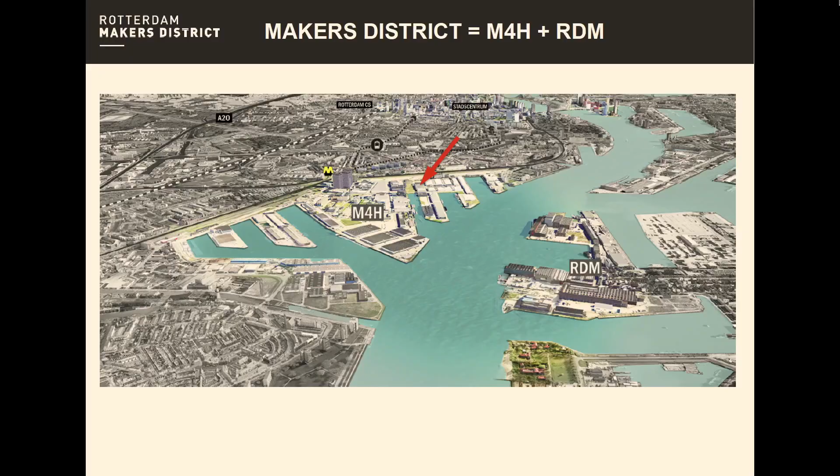Very quickly, some of you have already heard the stories, but again there are always new people, so very, very quickly: this is the Keilepand. We are in this area, M4H, and it's an area as big as the city center of Rotterdam. And in the coming 20-30 years, this area will be completely transformed into a living and working area.

We came here around 8 years ago, and at that moment it was clear there would be transformation, but not what the ideas of the municipality were. And we started together with the IABR, the International Architecture Biennale Rotterdam, who also have an office in the Keilepand, to talk about this.

So to talk about, okay, if we know that this new area is coming, what does it mean for energy, for water, for climate? And very quickly we came to the conclusion that to be circular, you have to do that together.

So we were very happy that this series was pretty successful. We did, I think, around 15 of these evenings over the turn of a couple of years. But even more happy we were that after a year, in 2019, we understood from the municipality that they wanted to have M4H stamped as a circular development.

And they pronounced 8 sustainable principles for the area. And the whole overall motto is collectivity as a basis for circularity. And that is something we try to do - we really try more and more to find each other to talk about it.

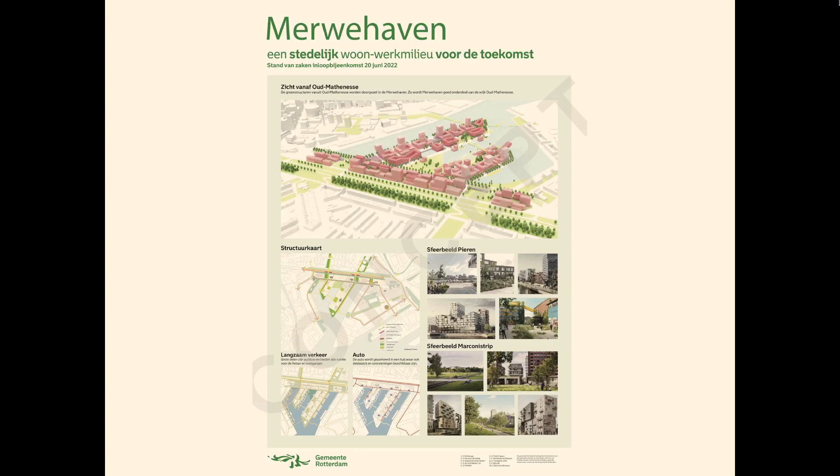Why this exhibition now? Building will probably start really quickly now, I think this year or the coming year, and exactly in 2030 this should be done. This is Merwepier in M4H, and of course this really needs to be Paris proof. This needs to be carbon positive, we hope. This is what we talk about, and what we do with the whole exhibition, because it's a setting to talk about how we get there. So tonight is one of these evenings.

On 15 September we stop, and be invited, because I hope that at that moment we can also tell you what we have achieved with all the debates and talks about the subject. Thank you.

Thanks, Monica. The first speaker I'm going to introduce tonight is one of the founding fathers—he objects to that term, he is one of the initiators, we're doing this with a family, with a team—one of the founding fathers of CARBONLAB, GROUPA's CARBONLAB, and one of the founding fathers of Carbon Stories as well. He will talk about what it means to aim for Paris proof in 2030, 2050, and what role installations have to play in that. Please welcome Willem van Genugten. Thank you.

Welcome to everyone, great that you are here. Zooming in on M4H, let's zoom out a bit. What are we talking about? What is the scale of the problem of what Monica called the mess we're in?

The scale is this: every 28 days we build the entire city of New York. Not just Manhattan, the entire city, all 5 boroughs—steel, glass, concrete, light posts, asphalt. We add this to the built volume of the planet every 28 days, so 13 times a year in total. We're now more or less in the middle of that. You can imagine what this means for the Paris Accord, and also what it means for water quality and air quality. So we need to change this.

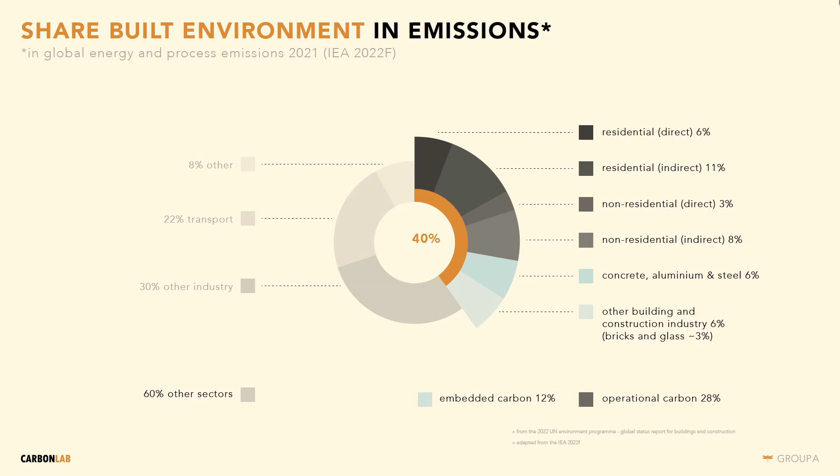Another way of painting the picture: when you look at carbon emissions related to construction, related to our sector worldwide, we're responsible for about 40% of energy-related emissions. 28% of those are related to maintaining the built stock, the existing building stock, in terms of energy—keeping them comfortable, and maintaining them by renewing facades and making changes to those buildings. The other 12% is what we call embodied carbon: all the emissions related to the act of constructing buildings, sourcing materials, manufacturing building elements, putting them on site, and putting them into a building.

This brings the question: what does this mean in general? How could we decarbonize? And the topic of tonight is, what role do installations play in this? I'm going to tell you an anecdote about a good friend of mine, Jacco Paauw. He's an architect as well, of HOH Architects. He once held a lecture in a chapel, a centuries-old building.

It was designed to speak with people, to address people—great acoustics, good light conditions, good temperature conditions. So perfect, no technology needed. Then, before the lecture started, the technical department of the chapel, of the lecture hall by then, closed all the windows to make it dark. Then they put on the show lights to make it light. Then the people came in and closed the doors. It got hot, so they turned on the air conditioner, which had a zooming sound. And then they gave microphones to allow the speaker to speak. So conditions that were in themselves perfect, then a lot of technology was used to simulate an already existing situation.

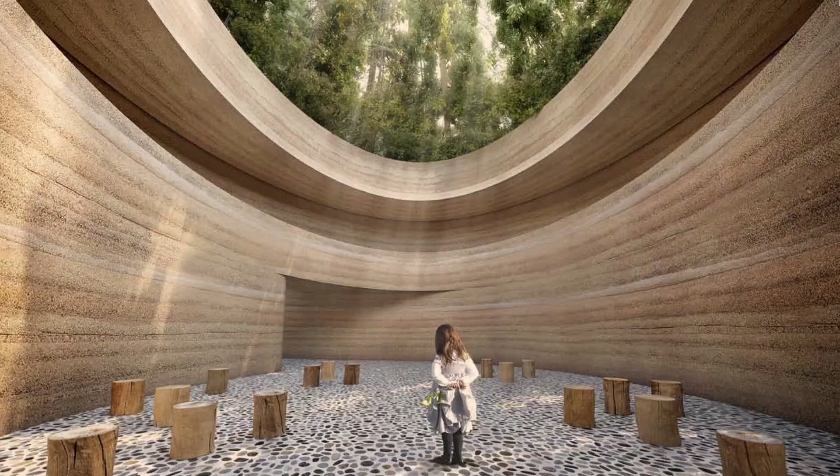That brought us the question we tried to answer with a prototype design: can we go back to a situation where we look at the design first, don't take technology as a starting point, and then see where technology has to be implemented? So not technology as a basis, but only where you cannot avoid it.

We do this because installations over the past decades have become a huge part of the budget—both the financial budget of buildings and the carbon budget. And this increase is not coincidental. It's because we started changing the way we build, and changing the way we regulate. This coincides with a sudden change in how we construct buildings.

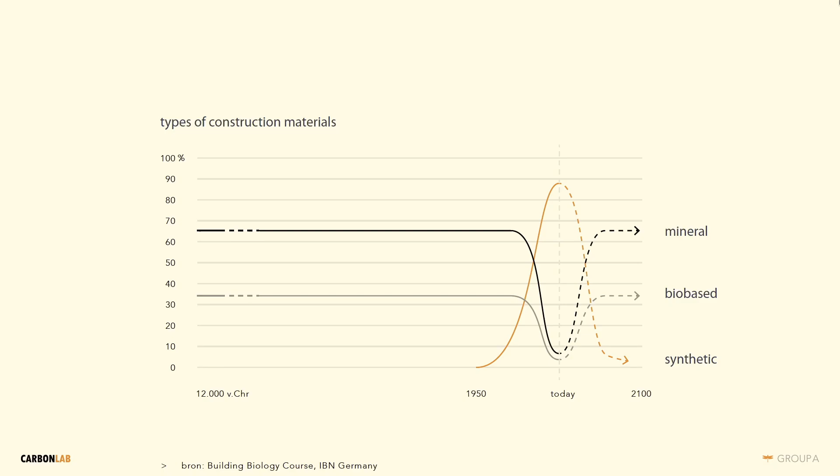So this is about how to integrate the design question. We changed the way we materialize our buildings. This led to a different need for installations to create the right comfort. This coincides, of course, with an incredible rise in carbon emissions, all more or less post-war.

This is what it effectively means for the building sector in our country. The remaining carbon budget of the Dutch construction sector, which concerns us all, if we don't change the way we build, is finished in approximately 2028. For the city of Rotterdam, it's actually 1.5 years earlier. You can imagine then we may have to just stop the act of building, or can we spread those emissions over a longer period of time?

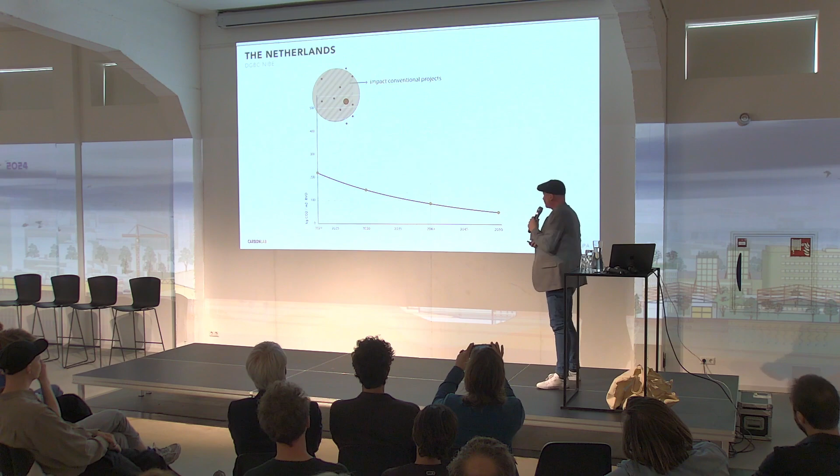So we posed the question in line with this exhibition: can we design a building that is high density, that fits the needs of tomorrow, of today, that fits within the Paris proof line, and not the Paris proof line of today, because we know our construction usually takes time. What we start designing today should meet the requirements of 5-6 years from now. So we looked at, can we bring a building within the Paris proof line's limitations of 2030?

Effectively meaning, can we go from 435 kilograms of CO2 emission per square meter, bear with me, to 139. And we even asked ourselves the question, can you go to 2050 targets, which is 50 kilograms per square meter, which is practically zero. And of course, what is the role of installations in this design exercise? Can we limit the installations? If there's anything you can hardly decarbonize, it's installations, because of the materials they're made of.

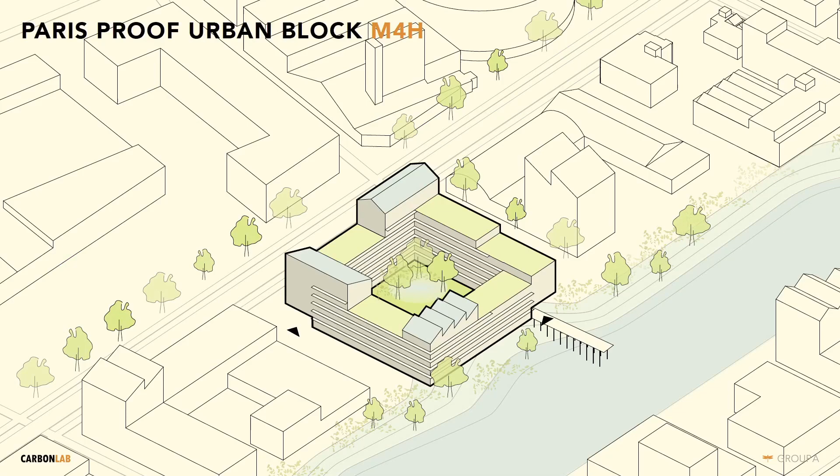We made a block for several reasons, but mostly it's a compact block that fits within the urban master plan that we had to keep with, and which gives a material extensive way of building. So you share a lot of materials with as many inhabitants as possible. You share walls, you share facade, you share roofs. So per inhabitant, a limited amount of material volume is required.

We made it into a block that is highly flexible, so it's what we call a solid, a building that could basically be anything. So you can extend the lifetime of the building, all the effort you put into it, all the CO2 you emit by building it, over a longer period of time, as long as possible. It can be offices, it can be maker spaces, which in this master plan is required. It can also be residential, so over time it changes function, but it could also be a hotel, it could be a care building, it could be perhaps a car park.

And we thought there's probably not one route towards this question, towards the answer. Can we do Paris proof 2030, 2050? It would be a bit weird to only elaborate one solution. So we elaborated two, and we are considering to elaborate another view, but at the exhibition you will find it here. There's two ways of reworking or elaborating the building.

One is called build to last. Here the assumption is, what if you can build it and the entirety of the building has a lifespan of 300 years plus? That means you could go heavy, you can work with thermal mass, you can work with materials that have good thermal control of the inner comfort. And we put ourselves the limitation that it has to be more or less sourced from within a 100 to 250 kilometer radius. And then what materials do you get? What can you build from?

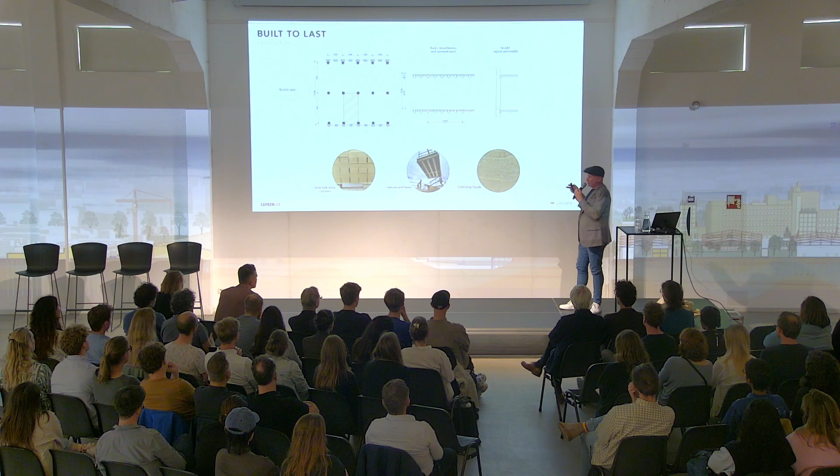This is what it looks like in section. The assumption is that for the installation part, you only need, on the inside of the outer walls, capillary mats, with which you can arrange the cooling and the heating.

Most other comfort levels are arranged by the architecture, not by technology. That means the whole floor plan is extremely flexible because the floor plate doesn't contain technology. This is an image of what it could look like. There's all kinds of other considerations we put into it, which I will not go into now.

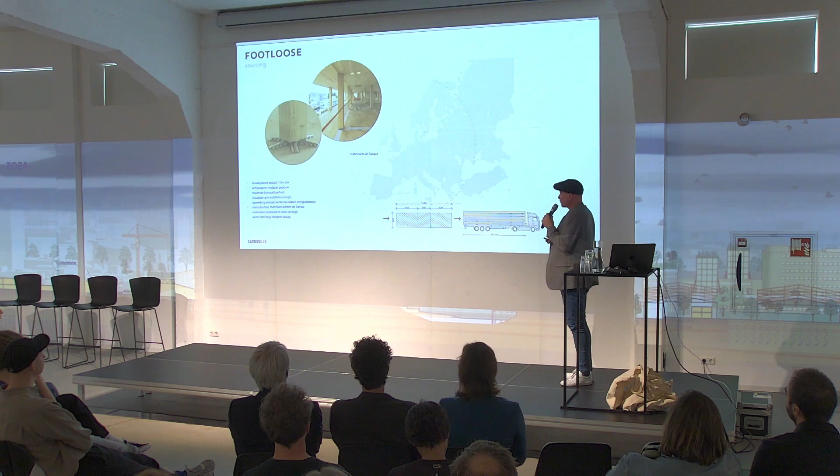Another way of looking at it: the materials are sourced all over Europe. It's a building we call Footloose, a design elaboration for a building that not as a building lasts for 300 years, but maybe as a building system, it lasts for 150 years plus.

To put it bluntly, suppose you build it now in M4H, and after some time, at least you have constructed something that can relocate somewhere else, maybe to Arnhem. So it's a lot of wood, bio-based facade packages, demountable, a flat pack system, like IKEA—the building can be mounted and demounted quite fast.

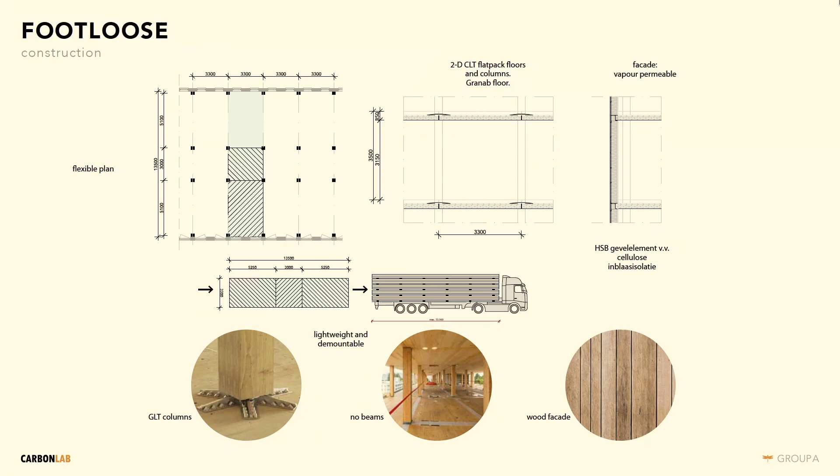More or less the same section, so there's no need to change the architecture dramatically in these two cases. Here we chose a system where the comfort level is arranged so that only the space you actually use, or even the area within a space you actually use, is heated with infrared panels.

Both these elaborations have wooden piling, as does the building we're sitting in today—it has wood piling. There's an interesting question why the whole country is on concrete piling nowadays, because you don't need it.

Then the question: can we meet the Paris-proof numbers for 2030 with the knowledge of today, with the data of today? Yes, you can. This elaboration is a staggering 8 kilos less than 139 kilograms per meter. Can you even go below the 2050 target?

In 2050, we've allowed ourselves the liberty of assuming that by then the energy mix of the Netherlands is 100% renewable. In that case, in the calculation model, all the embodied material CO2 scores go down dramatically. That means, of course, we have to do that as a country, as a nation.

It also means you still need to consider material use. It doesn't mean we can just go back to business as usual, because energy will be limited. There is material scarcity, but it can be done. We like to be hopeful. So yes, we can.

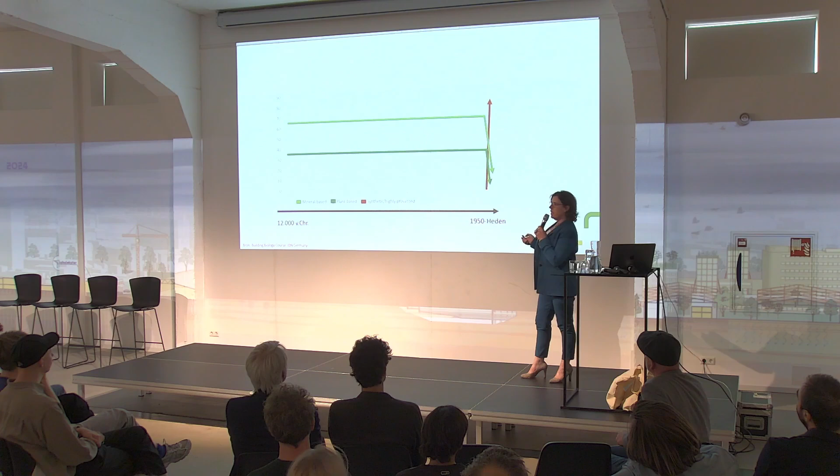Well, we've been building for quite a long time. We are building with mineral-based and bio-based materials, and we did that until about 1950, and certainly after the war when we had to build a lot of buildings in a really short time, you can see the change in using materials. For 12,000 years we used materials which are mineral-based, bio-based, out of nature. Then we had a completely change of materials we were using, and that's the red point you see in the graphic.

Those materials are highly synthetic and highly processed materials. Think about concrete, think about glass wool, think about PUR. They are highly synthetic, but there are also a lot of toxic materials in it, and most people don't know that. I'll give you some examples.

What is toxic? Well, think about VOCs, volatile organic compounds. You see the materials in which the VOCs are used. I could also show you the SVOCs, and maybe 10 other slides, but I don't have time for that now. There are about 128 million different kinds of toxic products.

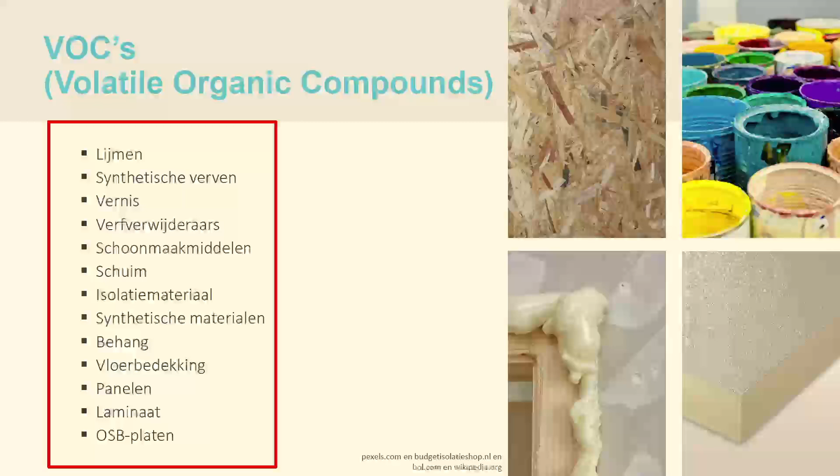128 million, think about it. Most of the toxic materials are not tested for what the effect on people is, or what the effect is for our planet. But we use it. We use it in all kinds of materials. You can see it in the table on the left side.

There's also another slide about formaldehyde. I guess you know it. It's used a lot in a lot of products. And the strange thing - this is one example, and it applies for most toxic products - when you see on the circle on the left one, since 1945 we knew that health risks are connected to using formaldehyde, or to breathing it in. Formaldehyde is a gas you can breathe in.

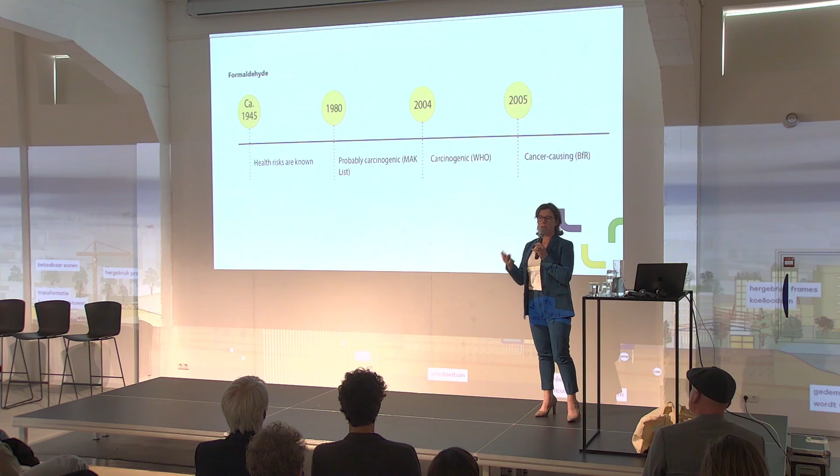So since 1945 - in 1980 we knew that it was probably carcinogenic, and in 2004 we knew it for sure: it is carcinogenic. And I was wondering, why are we still using it? I think I know the answer, maybe we can discuss this later. But we are still allowed to use it, and I think that's very strange.

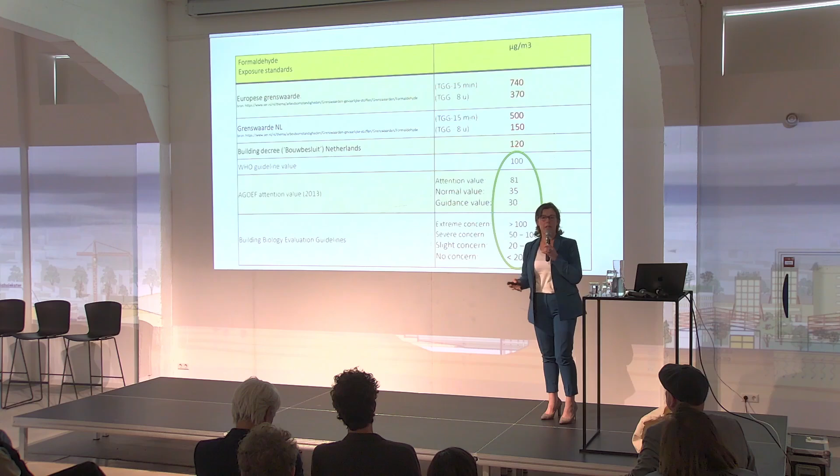These are the numbers - the maximum amounts you can breathe in without the risk of becoming sick, from the building biology guidelines or from AGOEF. The World Health Organization says 100 micrograms per cubic meter at max you can breathe in without the risk of getting sick. But these are the numbers we allow - so when people work with it in the factory, for instance making CLT or making glue or something, this is what's allowed to breathe in. And I think, again, it's very strange, because formaldehyde is carcinogenic.

What I advise when I'm advising companies how to build in a building biology way is most of the time to use natural materials. For most construction materials needed in buildings, there's already a bio-based or natural alternative you can already buy. So why use other materials?

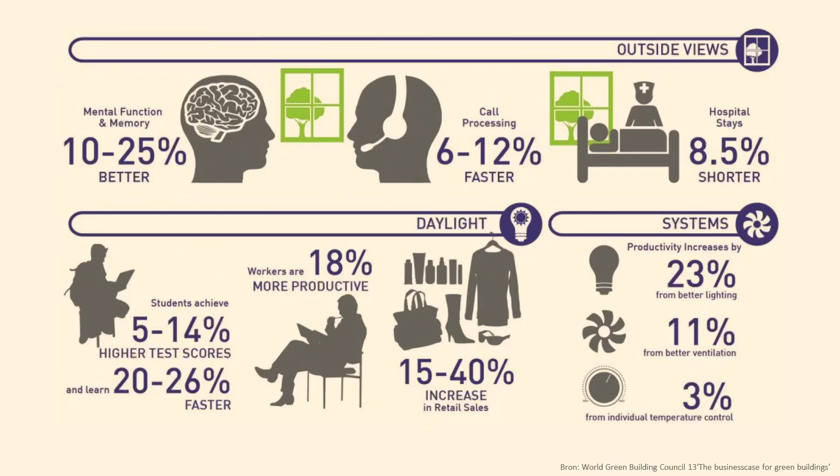To be honest, I could talk about this for an hour if you want, but I don't have the time. But when you are building a healthy building, these are the results you can get.

Let's have a look at the mental function, top left. When you have a healthy building, you can concentrate 10 to 25% more. Students achieve better results on their tests. And workers—this is very interesting for offices—have more productivity.

When you have an office and employees working there, you have a responsibility to provide a healthy environment. But you can also make a business case of it, and I can tell you more about that later. There are really companies now making a business case of higher productivity.

I guess we can check this out later, maybe for some questions.

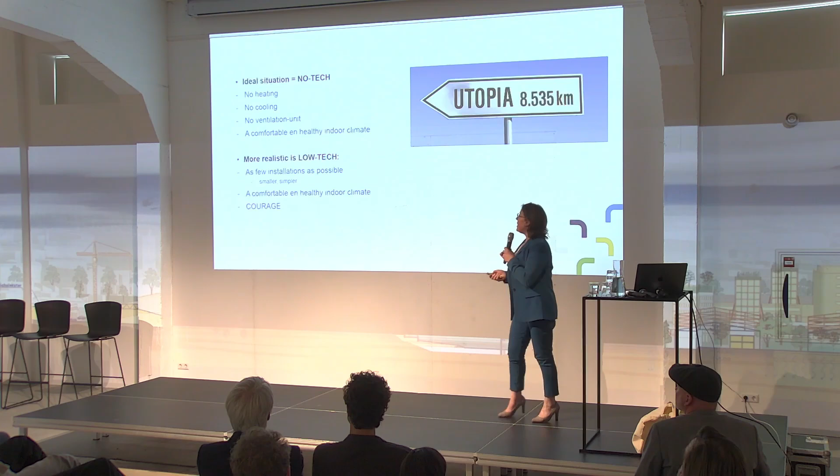Think about humidity, acoustics, and thermal comfort—bio-based buildings provide these by themselves. And when you use these characteristics, you can make the step to low-tech. I will explain.

I was very inspired by the building called 2226, named that because in winter it never gets colder than 22 degrees, and in summer it never gets warmer than 26 degrees. That's the reason for the name 2226.

It's interesting that this building doesn't have any installations. It's not bio-based, you can see that, but it has been the inspiration for us to make such buildings using bio-based materials.

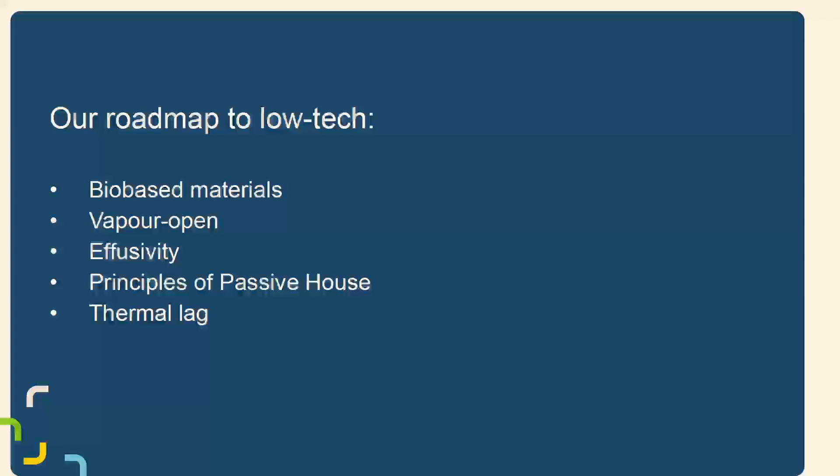Our roadmap to low-tech consists of five topics: build with bio-based materials, build vapor open, use the characteristic of effusivity, use the principles of passive house, and use the characteristic of thermal lag. I will explain.

This is vapor open, meaning, to put it shortly, that the construction can give us an indoor climate which is always between 40 and 60% humidity, which is perfectly healthy for people. So we use that.

We use the program WUFI, and also Ubakus. With these programs we can prove how this building is working.

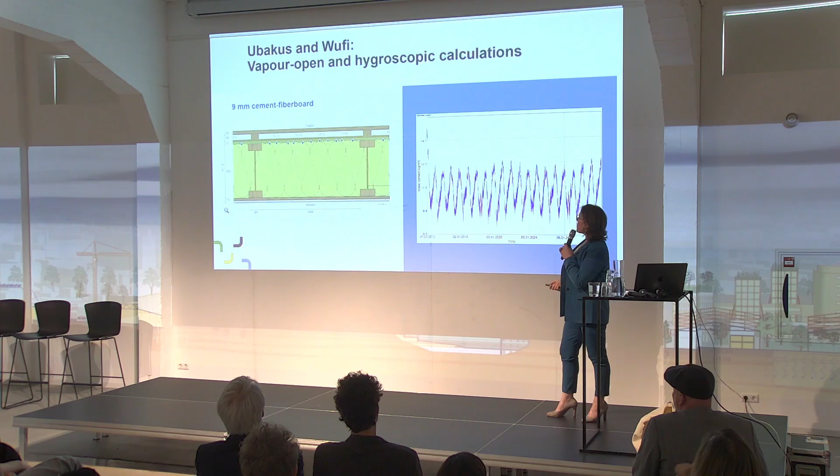In this case we checked a cement fiberboard of 9 millimeters, which is a bit of a pity—we sometimes use cement fiberboard because of fire safety, since you want your building safe from fire.

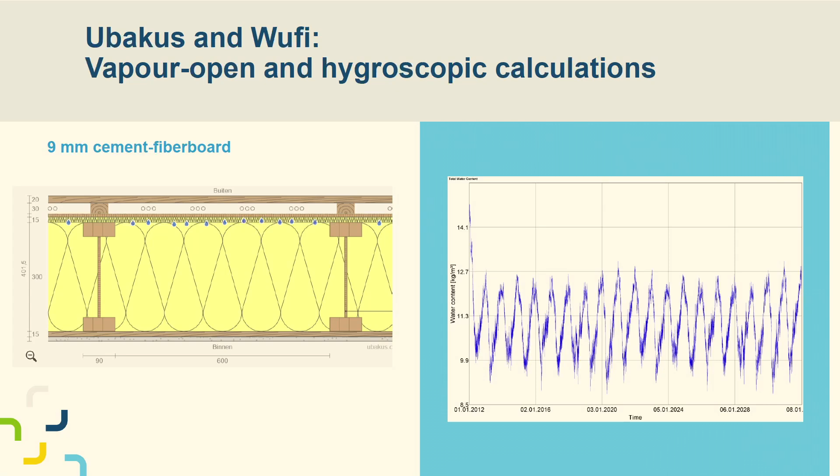We checked it for vapor openness. Ubakus said the construction gets wet—takes about 2 minutes to explain. You see the construction gets wet in Ubakus, but when we checked it in WUFI, there is no problem with that construction.

But when we used a cement board from 9 to 12 millimeters, it didn't work anymore—the construction became too wet. So that was no option for us.

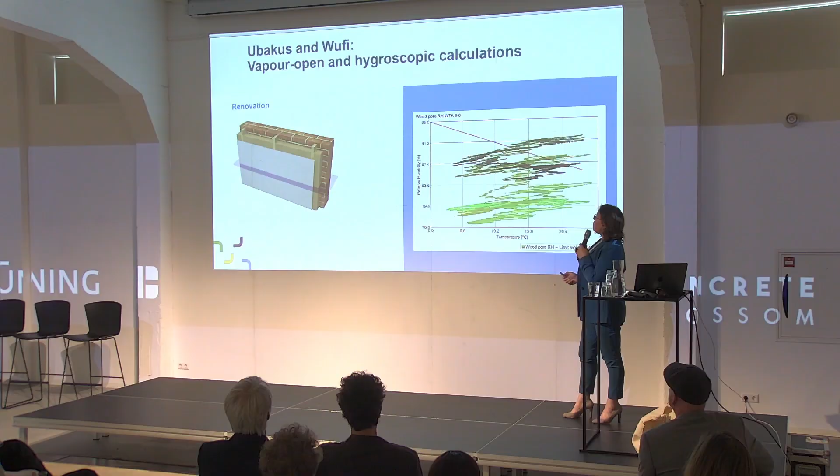Yes, thermal lag. There's another principle we use, and thermal lag means how quickly the warmth from outside gets inside, measured in hours. I have a nice picture here: two constructions that are exactly the same, but the insulation is different. On the left side we have glass wool, on the right side we have cellulose. You see the difference in thermal lag: on the left side it's 9.5 hours, and on the right it's 16 hours. So we use these principles to take the step to low-tech and avoid using air conditioning.

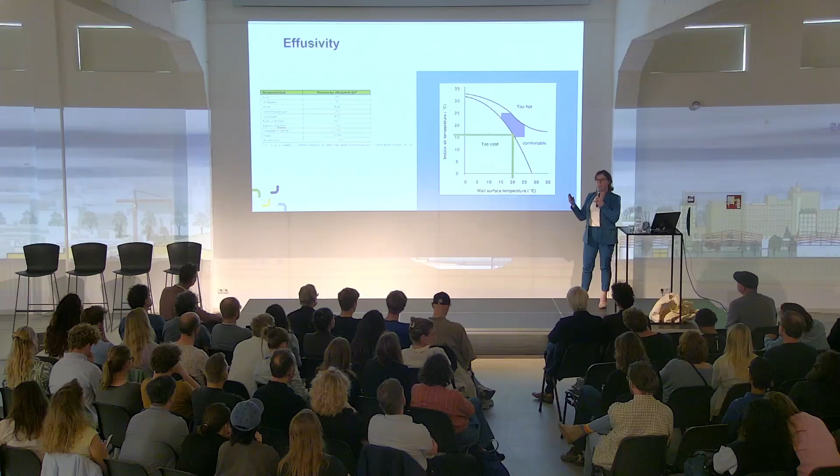Effusivity, well, we all know when we touch a concrete wall, it feels cold. When we touch a wall of wood, it feels warm. This principle means that the indoor temperature can be much lower in wooden buildings, so you can have an indoor temperature at 16 or 18 degrees and it's still very comfortable. So we use these principles also. And every degree you lower the indoor temperature saves 6 to 7% on energy costs.

And we use the principles of passive house, of course. I guess you know the principles, so I'll go a little bit faster now.

And with this example, we actually had an energy concept of 8 kilowatt, but because we used all those principles, we could lower it to 1.5 kilowatt. And because of that, you also have a great advantage regarding the net congestion we have in the Netherlands.

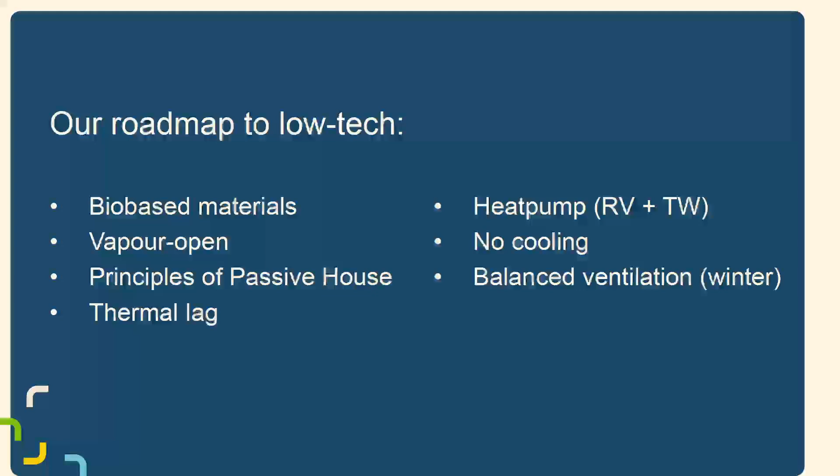Well, our roadmap: a small heat pump, really slower, really smaller than we're used to, no cooling, and balanced ventilation only in winter. Because we are bundling different principles and different characteristics, we can take the step to low-tech buildings. Thank you.

Thank you, Carla. You asked the question yourself: why are we still allowing these toxic materials, 128 million around us? Why are we? I think there's one answer, to be honest: it's the lobbying from the very powerful industries. They don't want us to stop with it. You can also look at the discussion we had with glyphosate — it's the same discussion, I guess.

And if we get past that, we go one level up. Why are we still allowing the industry and the lobby? Is it because the products are better? Is it because they deliver us comfort? Is it because it's cheaper? What would you say is the biggest problem?

The biggest problem is they want to keep selling their products. I guess that's the main reason. It's not healthier, because I just explained what's really more healthy for people. I had a slide about costs, but I didn't have time — it's not more expensive. The question is almost too big, because I'm asking you to explain what's at the core of a dysfunctional capitalist system, but it's interesting to discuss here.

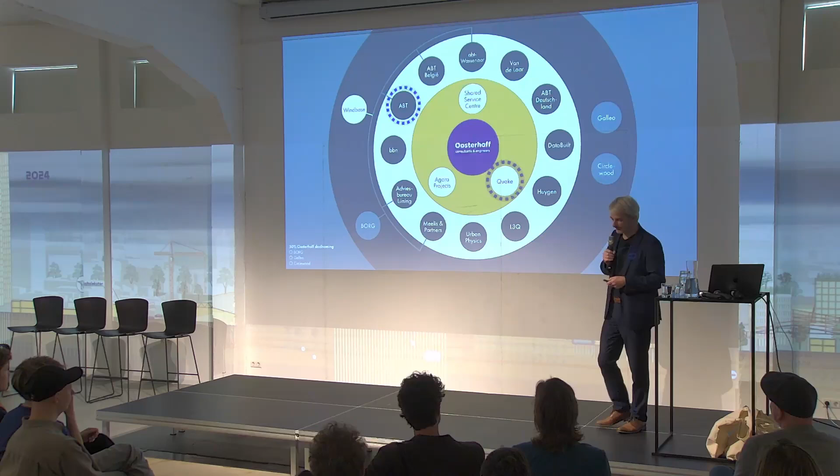This is what ABT looks like in the grand scheme of things. We are part of Oosterhoff. Also part of Oosterhoff are several other companies. Together we provide multi-desk services to design sustainable buildings. But what's also in there is Quake, an entity organized to promote innovations. So this study I'm going to show you is a study done by Quake, and it's related to carbon, of course.

It starts with this big task that we all have: we need to cut carbon. The current track is already a big task, but it's not quick enough. We need to increase the speed, otherwise we run out of carbon budget by 2028. I think that's also what Willem showed. And that requires a big change. It's not just minimizing stuff, we need to do it differently. We need to reconsider.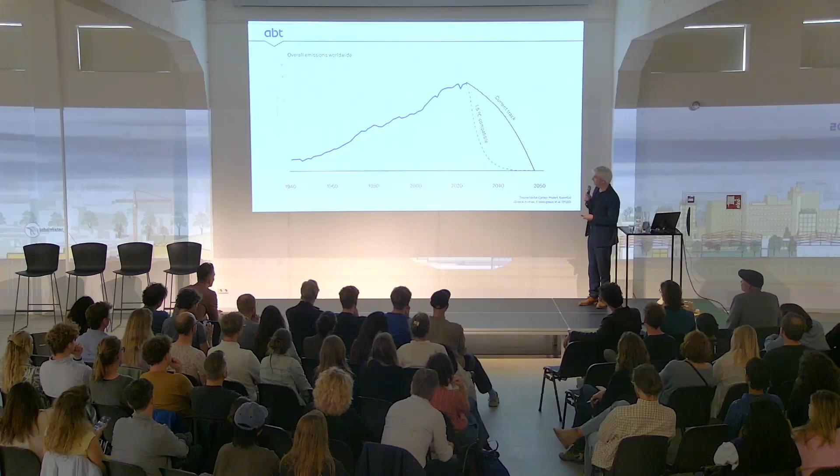This is not a very scientifically underpinned graph, I made it myself, but the left part is true, and the right part is true, but the combination is new. What you see happening is that we are at an extreme rate still consuming energy, and we are now at the stage where we need to cut down on carbon. That is not just a change, that is a radical change. So we need to do something about this, and the first thing is to look back and say, how did we get here?

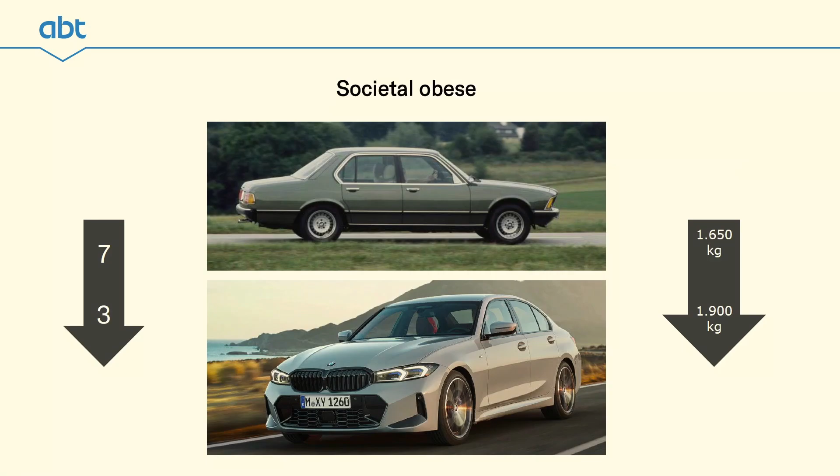This is the energy usage that we have, and I think that was your question, right? When did it all start? Well, you see here in the 50s, it exploded. This is not just about energy, it's also about material. When we look at our society, our cars are getting bigger and bigger. In the 70s, the biggest BMW weighed over 1,600 kilograms, but right now the smaller model is already several hundred kilos heavier. And it's not just the cars.

It's us also. This also has a relation with the disease stuff. We developed obesity. For the first time in 10,000 years, our life expectancy is reduced. Two main causes: stress and obesity.

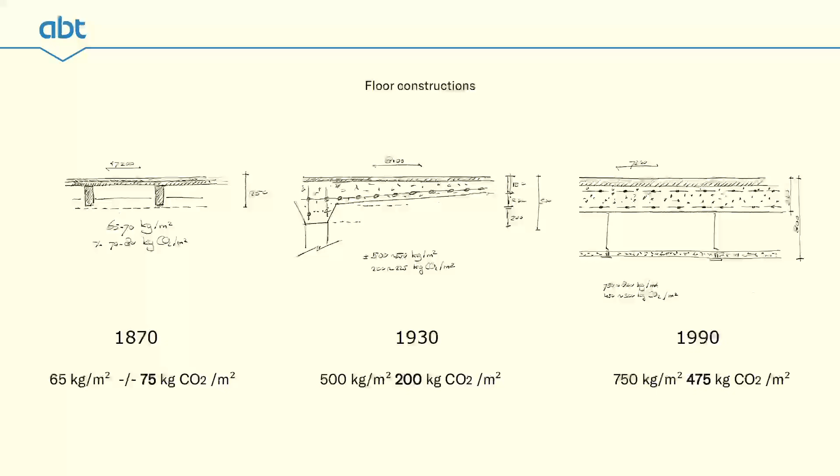Also, our buildings became heavier. 100 years ago, we built floors from timber. They stored carbon. Right now, we are designing concrete floors, 10 times heavier, emitting carbon. But they do insulate sound pretty good, though.

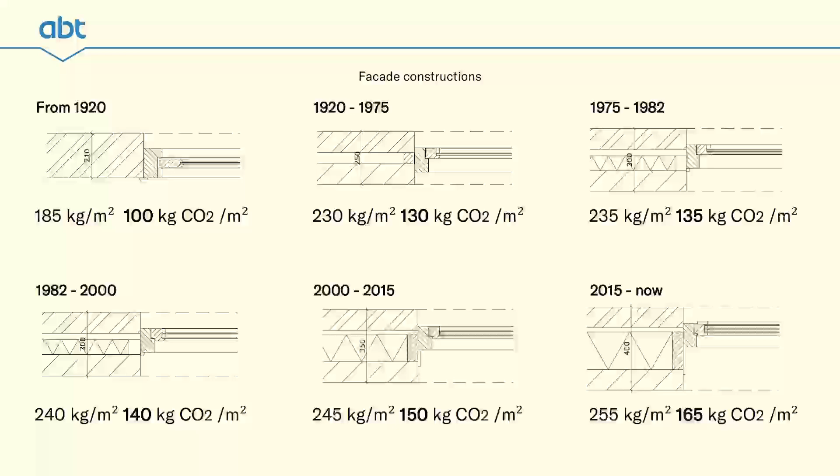When we look at the facade, it's not that much heavier, but it grew bigger, from 200 millimeters width to 400 right now, with improved insulation. So we are very well capable of keeping the outside really outside, isolating ourselves.

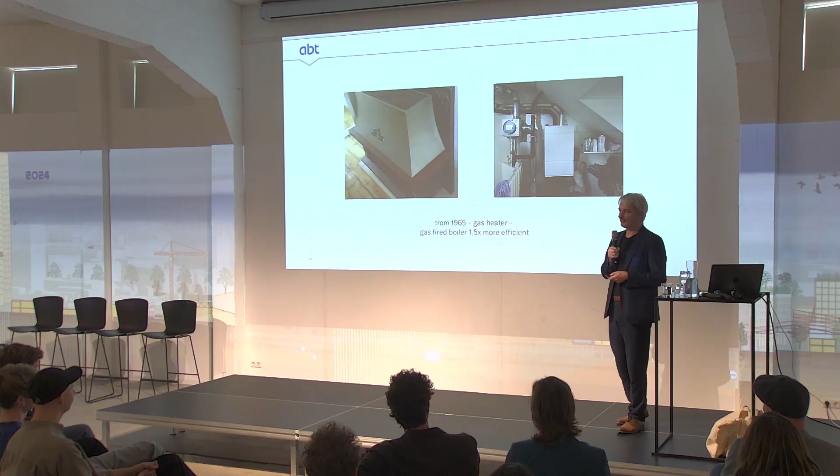And then the indoor climate. We did improve on the insulation part. In 1965, we heated our houses with this gas heater to the left. Then we had central heating, way more efficient. Heat pumps. The glazing: we had single pane glazing in the 60s, right now it's triple, quadruple, even vacuum glazing. So we improved the thermal performance also 10 times.

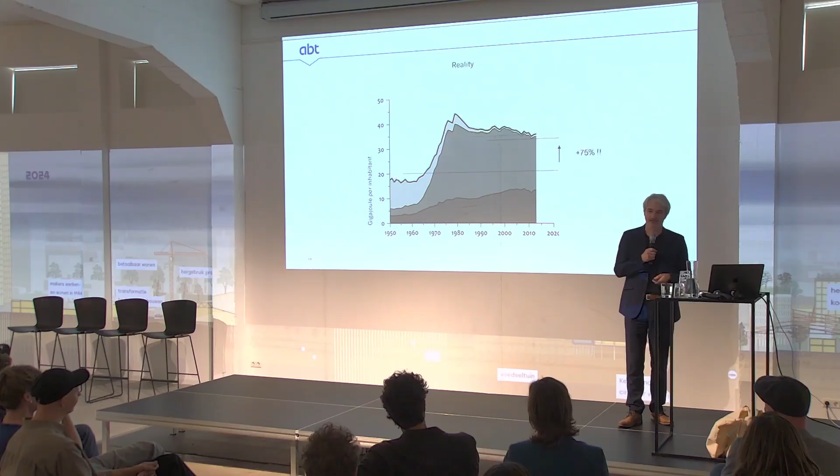So you would think we would reduce our energy consumption for heating our homes. Instead, it's a 75% increase per person for heating our homes. So what are we doing wrong? Well, we do have increased efficiency in the building skin and installations, so it's 9 times more efficient. But at the same time, we are heating our complete homes for 24 hours a day at a higher comfort level, instead of, to the left, just a wood burner for 2-3 hours a day at 19 degrees. So that is the difference: 65% plus in energy.

So what happened is that we grew bigger. We were heating our complete houses, buildings, distance from nature. We didn't want to experience anything from outside or from our neighbors. We increased our own isolation, our own bubble.

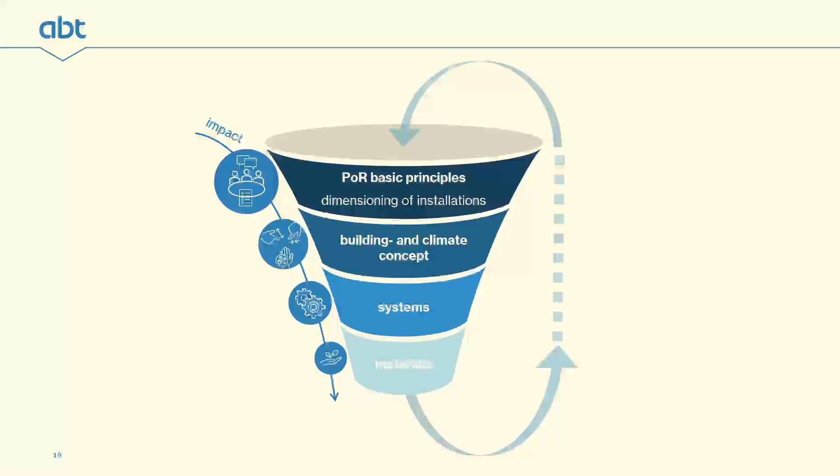So that's where we need to rethink. If we're designing buildings, if we're designing climate, if we're designing installations, and we look at carbon, then the biggest impact in reducing carbon starts right at the top here. That's your program of requirement. At what level do you want your comfort to be in this building? Biggest impact.

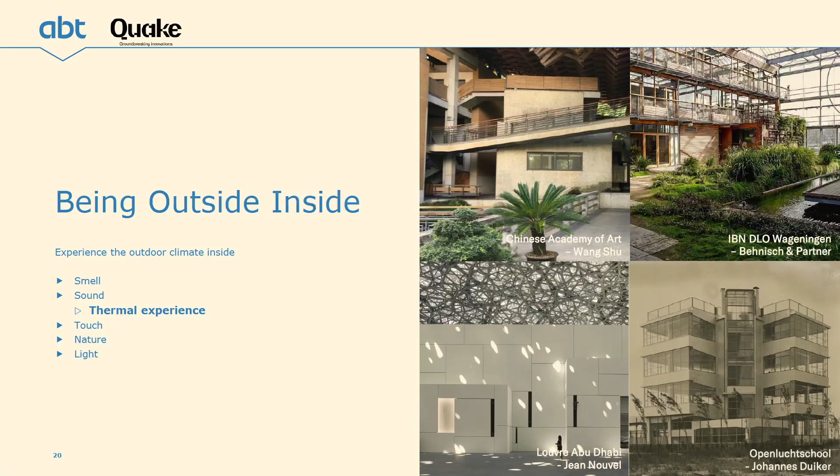I think it would be way better if we could have a bit more nature in our buildings, a bit more outside on the inside of our buildings. There are several famous projects that already did this in the past. One of them is Openluchtschool from Duiker. They designed this building in the 1930s for children with diseases like asthma, because it was a healthier building, a healthier school. If it's healthier for sick children, it's probably also healthier for us.

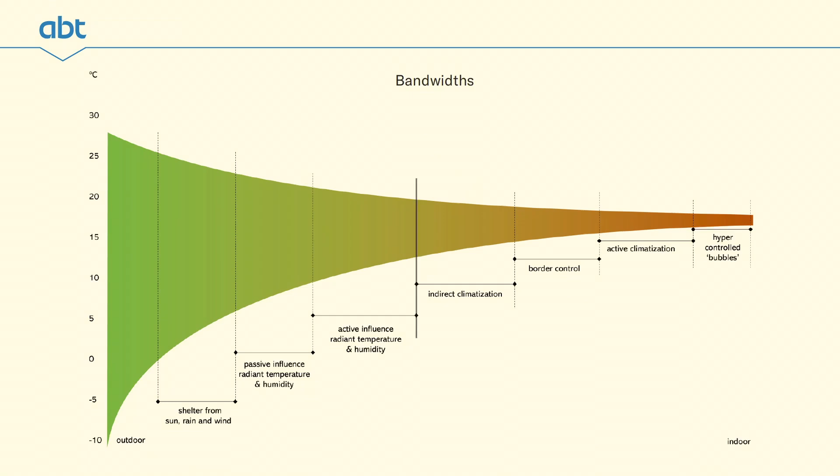And how do you design this indoor-outdoor climate in your home? Because there is a big scale of different climates that you can design in your building. The most extreme is outdoor to the left. The other extreme is hyper-controlled bubbles to the right. But there is a tremendous bandwidth that you can play with.

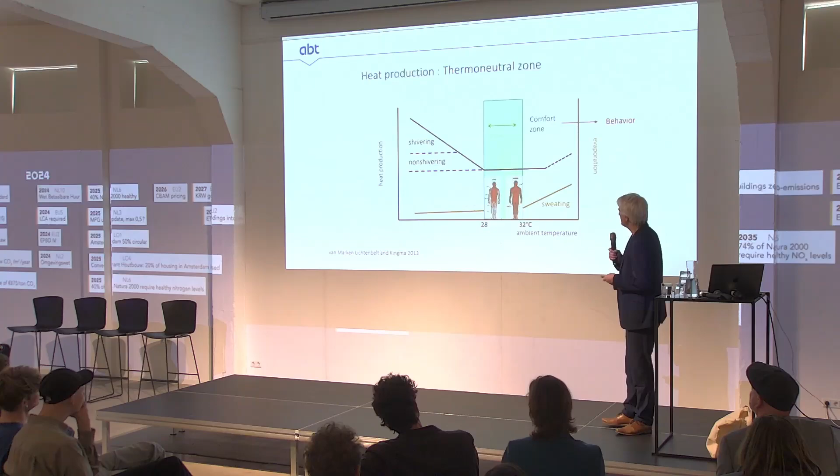We as human beings can adapt. Here in the middle, the comfort zone - we are designing buildings with a very small comfort zone. And that means our body is not used to adjust. We don't need to, we are in perfect condition. That's why we grow bigger.

Do you know that the energy we use in our body to live, to move, and just for breathing and living, is 60 to 70% of the energy consumption needed to keep your core temperature stable? Well, what happens if you're always in the middle of your comfort zone? You don't need the energy.

You grow bigger. But you can train that. Athletes know how to train and how to adjust. So you can actively train your body to cope with cold, extreme cold, or extreme heat. It has a big impact on your health - lower heart rate, lower blood pressure, and your comfort zone increases, it gets bigger.

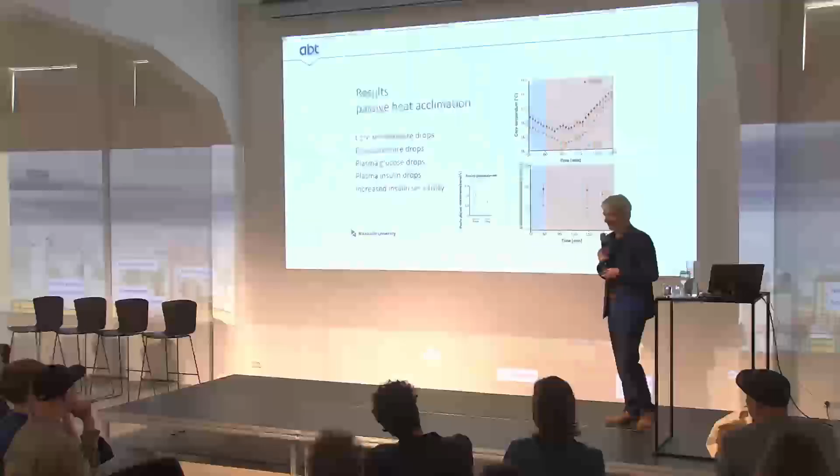It's not just for athletes. You can also train your body passively. Just put yourself in a slightly warmer or slightly colder condition. Your body will adjust, your metabolic rate will rise with health benefits. So we know it's not a very big problem to be sometimes a little bit uncomfortable. On the contrary, it has health benefits.

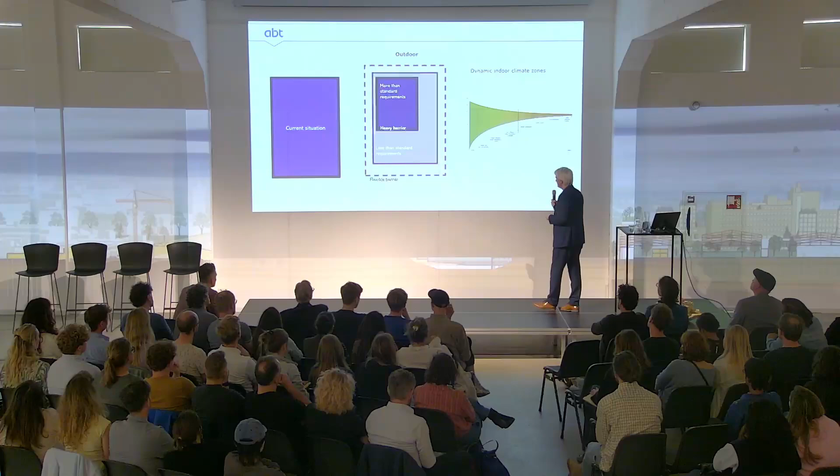So why don't we design a bit less controlled environments, a bit more outdoor in our buildings? If we're doing that, we can do that with zoning in buildings, because you're doing all kinds of different stuff in buildings, and not every place has to be fully controlled. Some places can be less controlled or even no regulated climate.

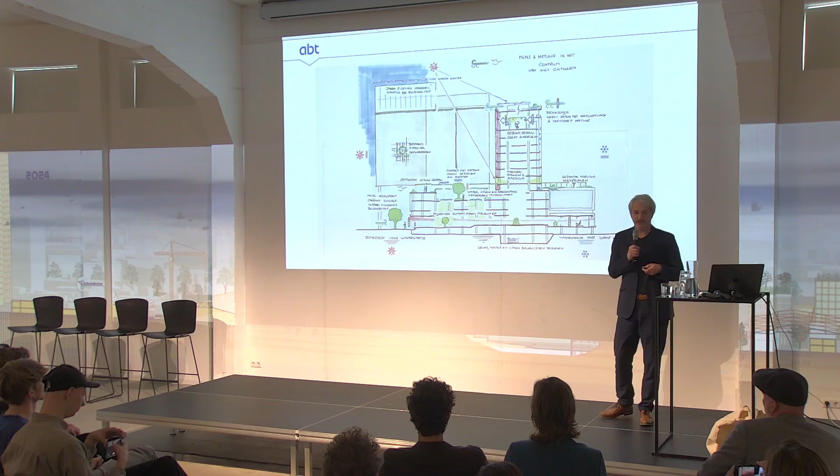And that's exactly what we did for this project, Paleis van Justitie in The Hague. That's a courthouse, an existing building. What we did there is we designed a bit more outdoor climate in the current courthouse, creating climate zones. To the left it's outdoor climate, and the deeper you go into the building, on the right-hand side, it's the courtroom.

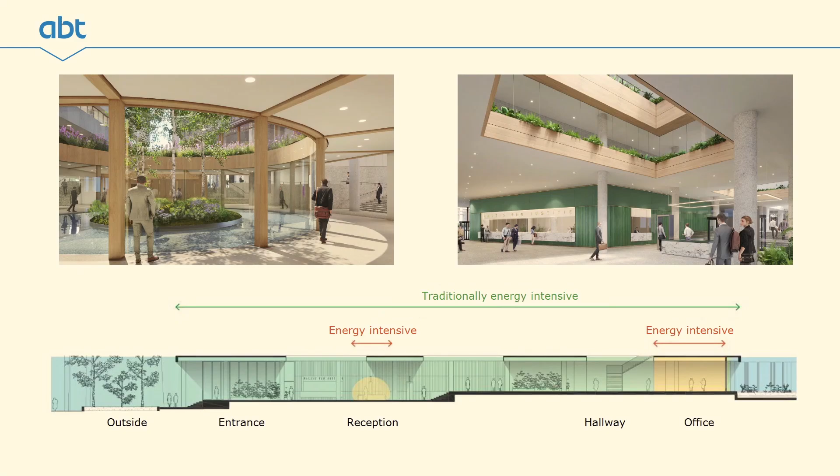The courtroom needs to be controlled, so the right-hand side is fully controlled. The left-hand side is almost outdoor, and in between, lots of space for passive climatization. This is a section - what you see here is that traditionally, the green line, you would fully climatize this building. But now we are only climatizing the reception intensively, and the offices and the courtroom, and all the volume in between gets a passive climate, mimicking outdoors more.

It's much more dynamic, and this enables us to reduce the installation rate. I think we can reduce the installation rate in this building by 30 to 40% because of this approach.

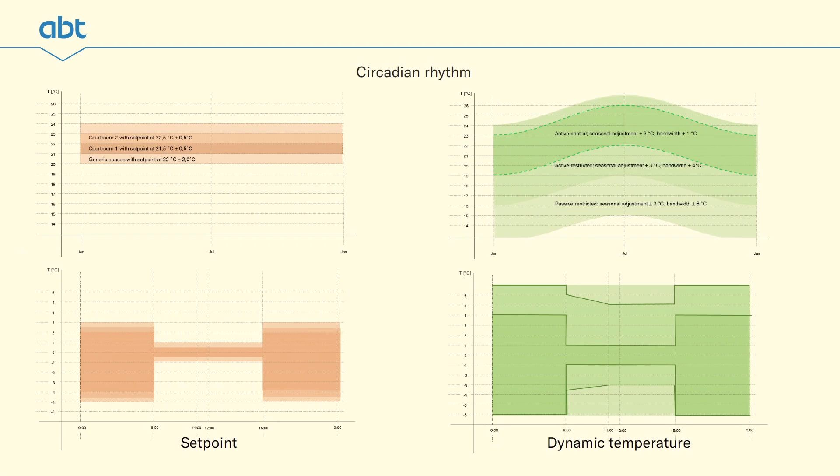But we're also using a different form of climatizing, not through set points, but with bandwidth. So we are allowing the temperature to be between 20 and 24 degrees Celsius, or 19 and 25, depending on which zone you're in. Not just between those hard lines, but also depending on what season we're in. So it might be a bit cooler in winter, and in summertime we allow it to increase, as you see on the right-hand side.

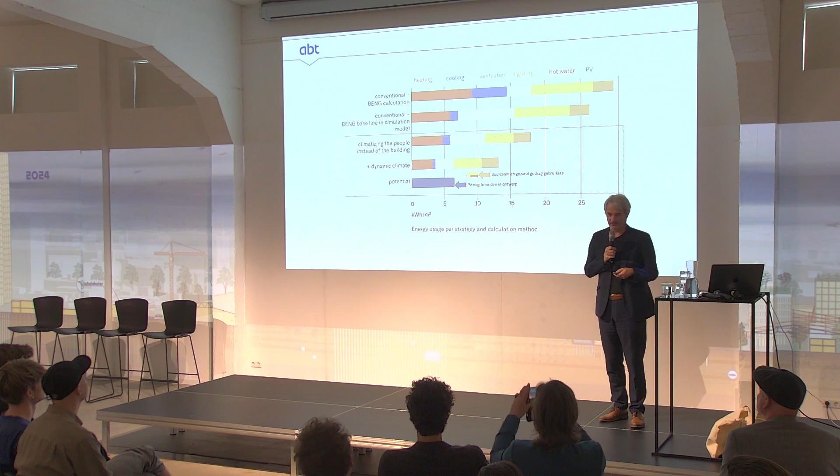That also has a real energetic benefit. If we introduce the zoning that I showed you, we are able to reduce the energy consumption by 30% for heating, lighting, ventilation. And if we are using this bandwidth control and the circadian arrangement, another 25% can be cut off from the energy consumption.

So, big gains. I think this is about the last slide. I got 2 more slides, but those are a bit engineering, so not very sexy.

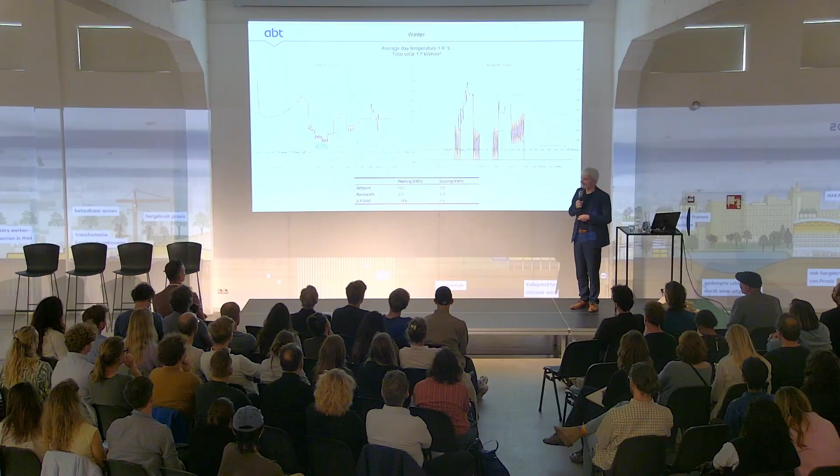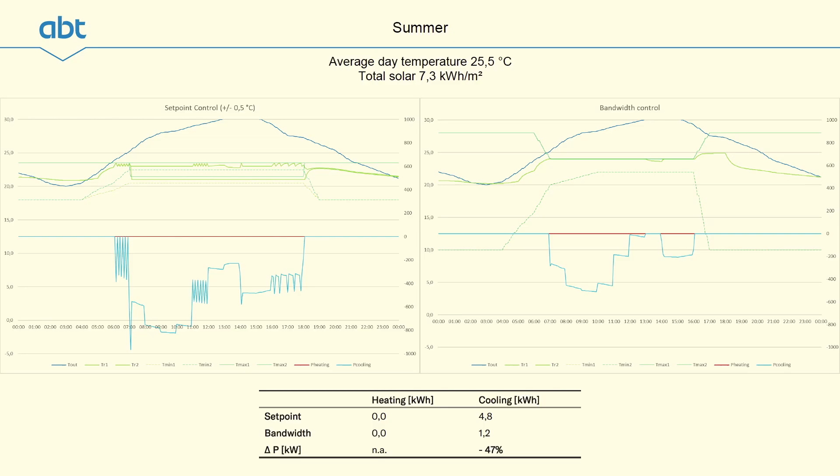So to sum it up - I think this is the old presentation, right? Yeah, to sum it up: I would really like this presentation to be food for thought to reconsider this program of requirement, this first step, because if we allow ourselves to integrate a bit more outside with inside, then there is a lot to be gained. Thank you.

Thanks, Jacco. Did you actually send us a new presentation this afternoon? Maybe something went wrong, excuse me for that. No problem, what did we miss? Not much, I did some visuals, just put some - I don't remember. That's why I needed the graph.

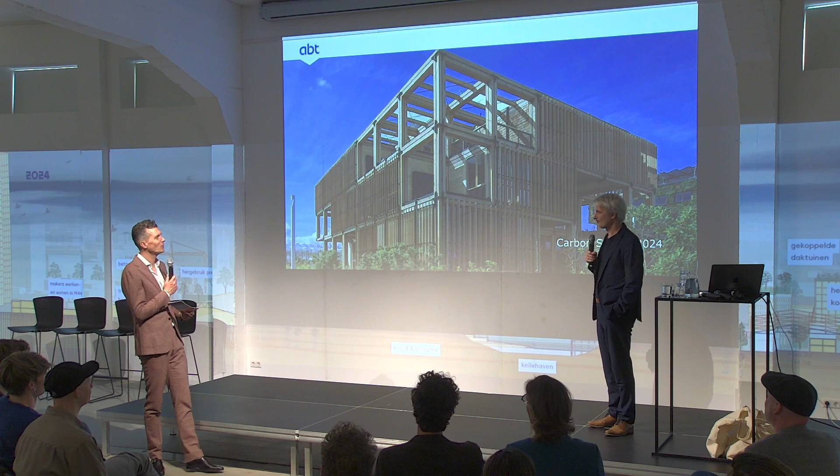Thanks for your presentation, and thanks for at the same time solving obesity with a very simple adagium: just get out of your comfort zone, right? During your presentation I get the feeling it's not that difficult, yet I start to get more pessimistic by the minute. How optimistic are you that we as a society can fix this, can make this U-turn?

I think it's a very difficult task. But I think one of the main difficult things is to convince your clients that you need to change the program of requirement. For apartments, we have embedded this system in the NTA 8800, that we need to comply with this - what is it called, Theo - so there's this thermal comfort index that you need to meet.

But these private clients, they also have this program of requirement. If you're designing a building for a government, the RVB has their standard program of requirement, and they tell you what your indoor climate needs to meet. It's very difficult to have that approach change. So I'm very happy that we managed to do just that for Paleis van Justitie. That gives me hope.

What did it require for your clients, why did they do it? I think they were also driven by the sustainability that is needed, the cutting of carbon, but also the healthier environment it will gain. What happens is that the most important rooms in this courthouse - the courtrooms themselves and the offices - they are climatized. So it is, I think, the best of both worlds, and we were able to convince them.

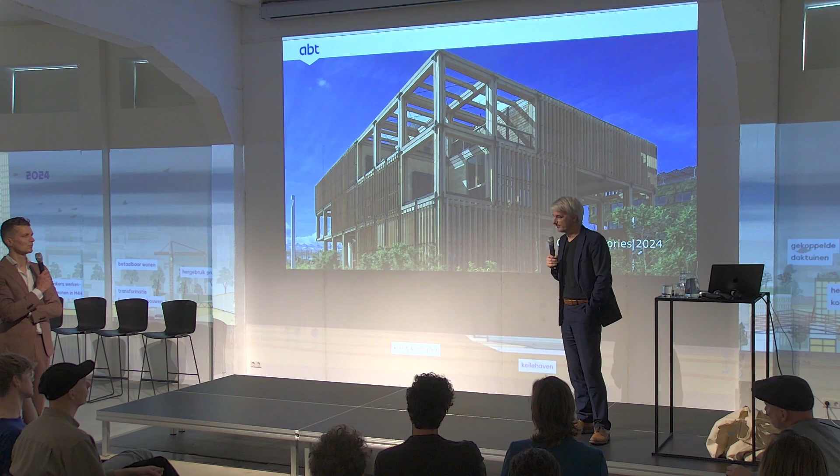I think that if we need to cut carbon in materials, we need to build more lightweight buildings. We need to use wood, timber for buildings. I think we can do that very well, and I think we need bio-based materials, because building with other materials doesn't give us the advantage of storing carbon on the short term, and we need a short-term solution. We can take into account that in 75 years we are able to reuse some steel beams - that's too late. We need to cut carbon right now.

So that's why I think that we need to build with timber and hempcrete and bio-based materials that store carbon. At the same time, if we are cutting on installations and reducing our comfort level - which has health benefits - this is a double-edged sword, because we will also save energy at the same time.

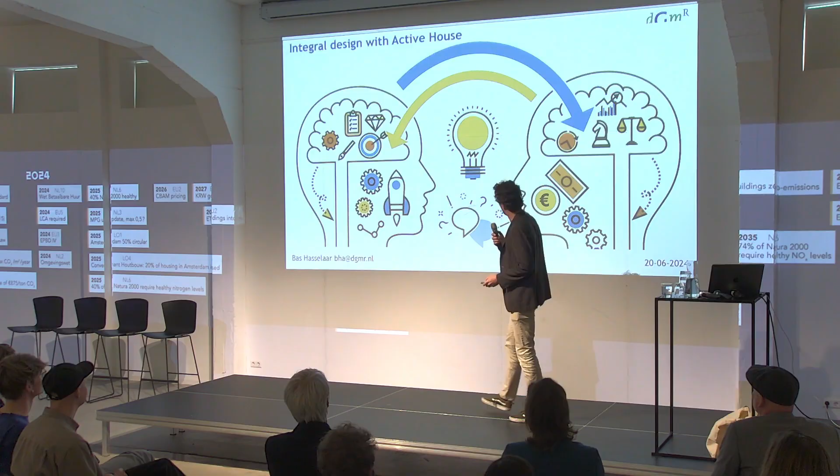Always kind of difficult to see yourself so much larger than life on stage. I'm talking about integral design with Active House. It is sort of a continuation of many of the things that all the speakers have talked about here earlier, but it will all make sense and come together with the end result.

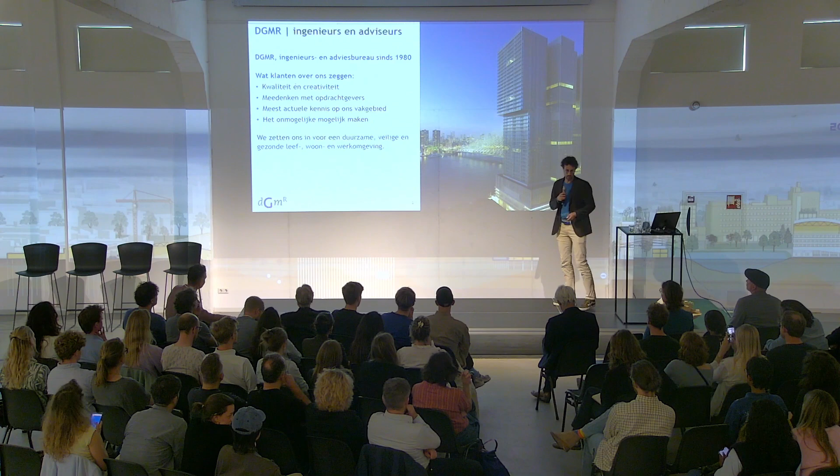I work at DGMR. We are an engineering firm, one of the larger ones in the Netherlands. We pride ourselves on our quality and creativity, and we are working towards a more sustainable, safe and healthy work and living environment. This is just some of the things we do.

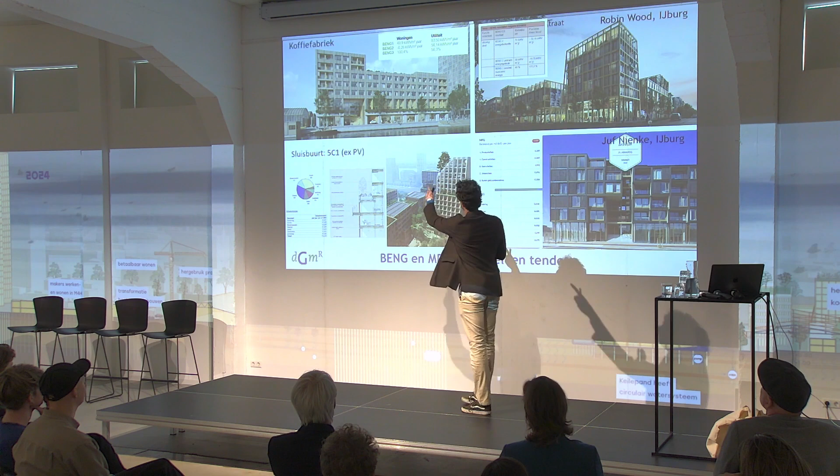I myself work on a lot of tender projects where we have quite ambitious goals. For example, here, Koffiefabriek in Amsterdam - I don't know how familiar you are with the BENG scores, but these are all energy neutral. Same with the MPG, the environmental performance of a couple of tenders, where we achieve, without the foundation, an MPG score of 0.32 here, and 0.4 there, which compares to the current guideline for construction in dwellings of 0.8. So these are quite low scores.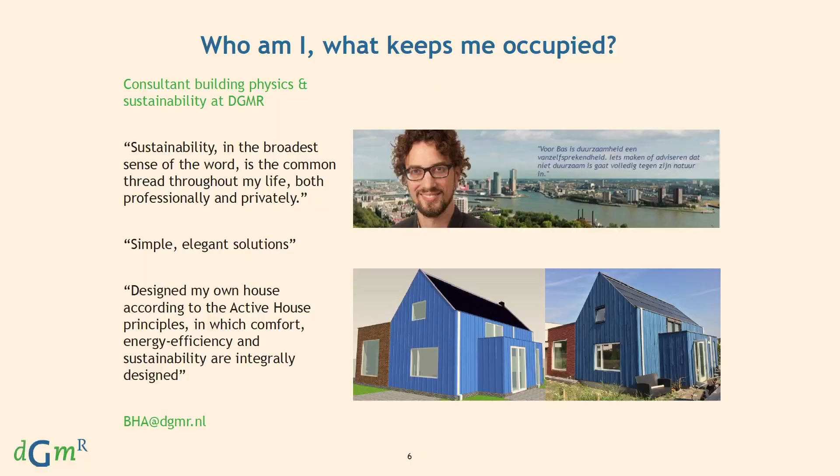And who am I? What keeps me occupied? I also like to put my money where my mouth is. I designed my own house, I built my own house - this is an active house. It's here at the bottom.

I like simple and elegant solutions rather than complex, very technical ones. Sustainability in the broadest sense of the word is the common thread throughout my life, both professionally and privately. I recently announced at my company that I will not work on projects anymore that have no ambition with regards to sustainability.

And I built my own house, which apparently was a thing - it says a building physics expert designs his own house based on indoor climate. Why? Health - a healthy indoor climate leads to better performance. It's already been mentioned here a couple of times.

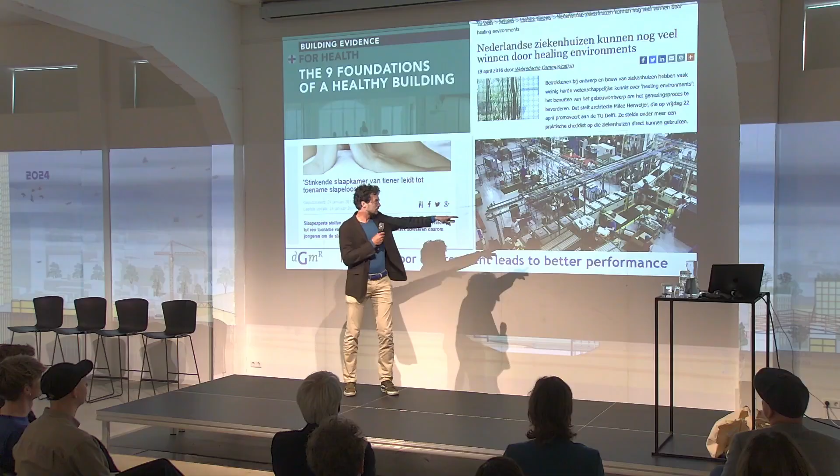Healing environments for hospitals - people that lie in bed in a hospital near the window and have a view toward the outside, and it should not be a brick wall or a parking lot, but if they have a view on a park, for example, they will significantly reduce their time in bed. There were studies where people had, I don't know, some appendicitis removed, for example, and if they were in a room without a window, they were in hospital for about four nights. If they had a view towards the outside with a view on trees, they were 2.5 days in the hospital. You can imagine if you work in an environment like this with bad lighting, you will make much more mistakes than in an environment with daylight and high quality.

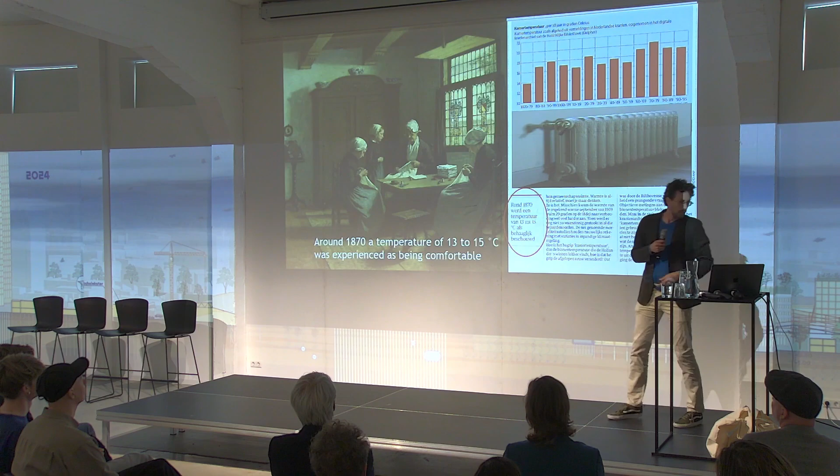Around 1870, we were used to having an indoor temperature of 13 to 15 degrees. That was considered comfortable. Since then, we have increased our knowledge of building and technological solutions, and right now we have an indoor environment considered comfortable between 20 and 24 degrees, which is of course a tremendous waste of energy if you consider that 13 to 15 can also be considered comfortable.

This is something that I borrowed from Wouter van Marken Lichtenbelt. I saw Jacco also using some of his slides. The thermal environment has benefits. If you have larger changes in the indoor environment, you have health benefits. You can get yourself used to lower temperatures.

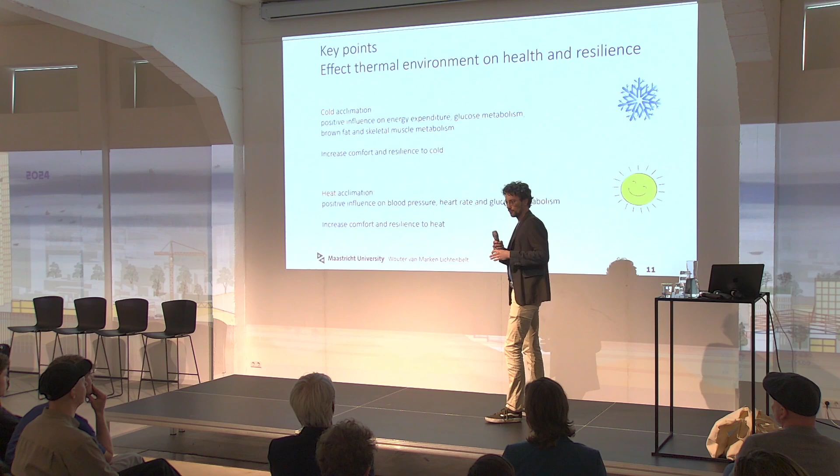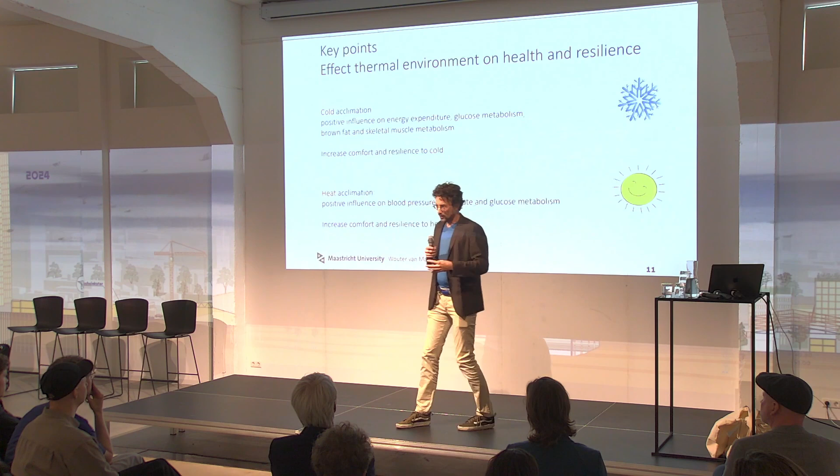There was a study where people were obese and had diabetes, and they were put in a controlled chamber, I think 15 degrees, wearing only shorts and a t-shirt for 2 weeks. For the first week they were complaining, very cold, shivering. But after about 10 days they got used to the temperature, and after 2 weeks they were fine being in 15 degrees. Even better, they could reduce their medicine intake for diabetes by 50%, purely by thermal training.

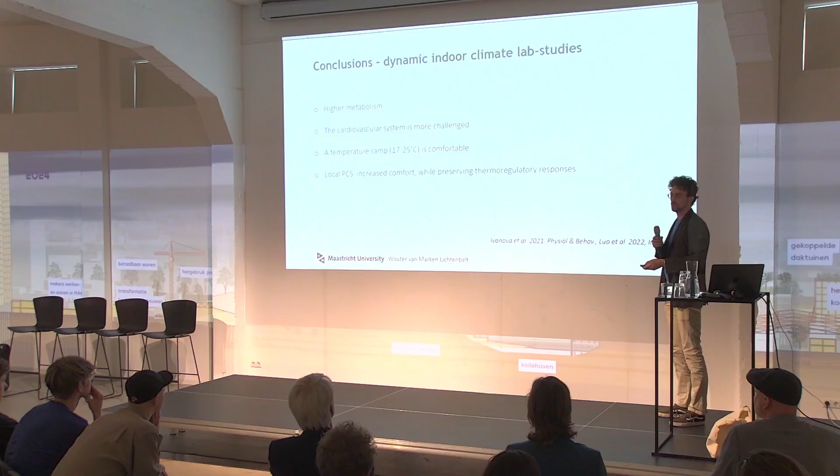You can increase your comfort and resilience to cold, and it has a positive influence, as you've read. So if you have an indoor environment that doesn't have very strict temperature levels, but allows for cooler temperatures in winter, and higher temperatures in summer, your body will appreciate it. You'll get a higher metabolism, your cardiovascular system is more challenged, and a temperature ramp of 17 to 25 degrees is comfortable, rather than 20 to 22. Of course, this tremendously reduces your dependence on climate installations.

So if you allow this in your building design, you allow your indoor temperatures to drift, which may be healthy. It seems realistic since this comes from a university professor. It will contribute to a sustainable built environment because we need less energy consumption for climate installations. Of course it's not just temperature, you need a good balance, diet, physical activity, all that stuff. But we can use this knowledge to create better buildings.

Carla also showed this graph, I will explain it. The typical building business operating cost is 90% of a company's expenditures going towards staff and salaries. Then you have about 9% of the cost going into the rent of a building, and about 1% for energy consumption.

What then if we apply a 10% variation? So we spend 10% more on a good quality indoor environment, on the building installations. If that increases our rental costs by maybe 1%, but if the staff cost and salaries improve in efficiency and performance by only 1%, you've already gained back your costs.

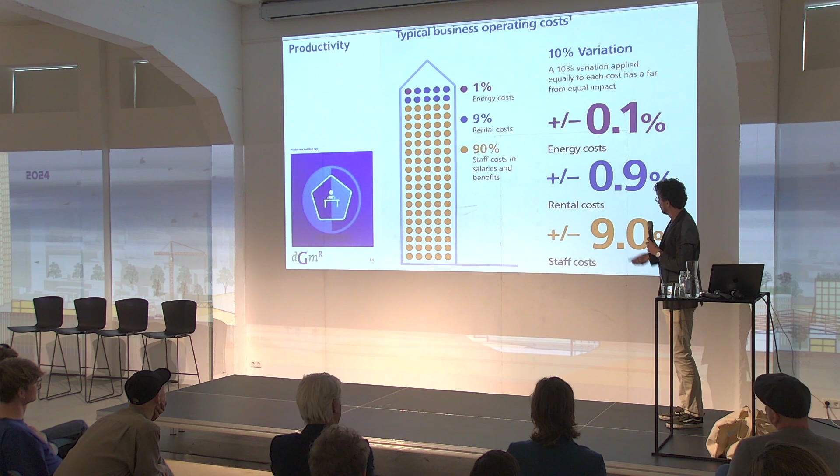It's now 30, even 40% of a building, maybe on the premise of having everything very narrow climate zones, which may need to change. But this is why the indoor environment has an enormous benefit and effect on your staff.

So then, Active House. As Geert introduced, myself, I am the chairman of the Dutch Alliance of Active House. I've been a board member of International for about 5 years, and I have written these Active House guidelines, and I was the chief editor of the 3rd edition of the Active House specifications.

But what is Active House? Active House is a vision on how to build. It integrates comfort, energy, and environment, and it does this with 9 themes.

Active House works with both qualitative and quantitative measures. Some of these things, for example the view outside of a window, you can't really put a number on. You either have it or you don't. So it's a yes or no, not like a 5 or something.

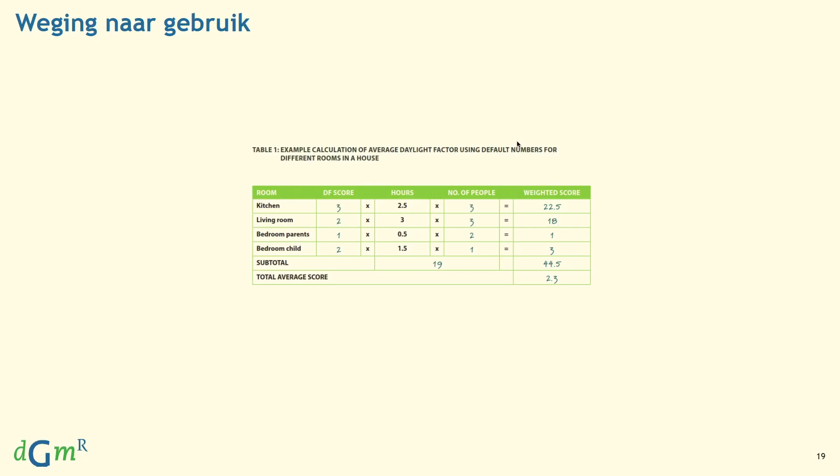This is one of the few, or maybe the only, label that I know of that has a weighted score. So rooms that are used more intensively by more people are weighed heavier than rooms that are your spare bedroom, for example, that you use 3 days in a year. Good performance of that room is not as important as the main living room, where you live most of your day or most of your life.

So it works with daylight. I will skip through this a little bit quicker. If you're really interested, I will give you more information afterward.

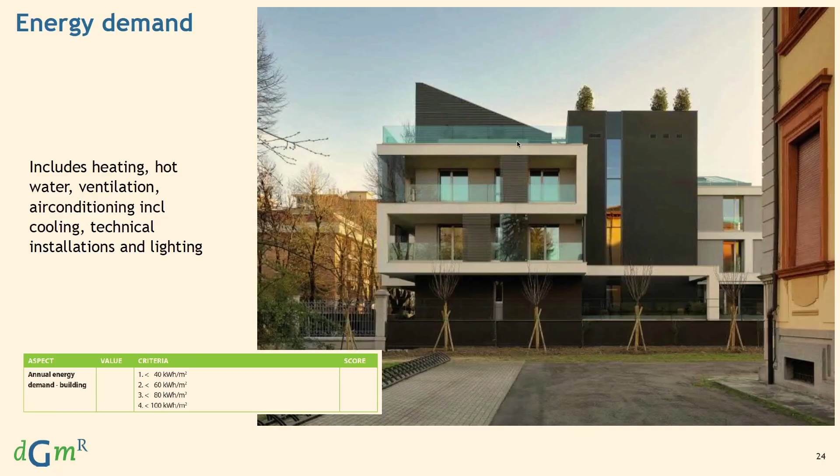Thermal environment, air quality, acoustics — this is new since the 3rd edition. The energy demand of a building, energy supply, of course, and the primary energy performance — these three are very similar to the BENG scores, BENG 1, 2, and 3.

Of course, the environmental performance, so the materials, and fresh water consumption.

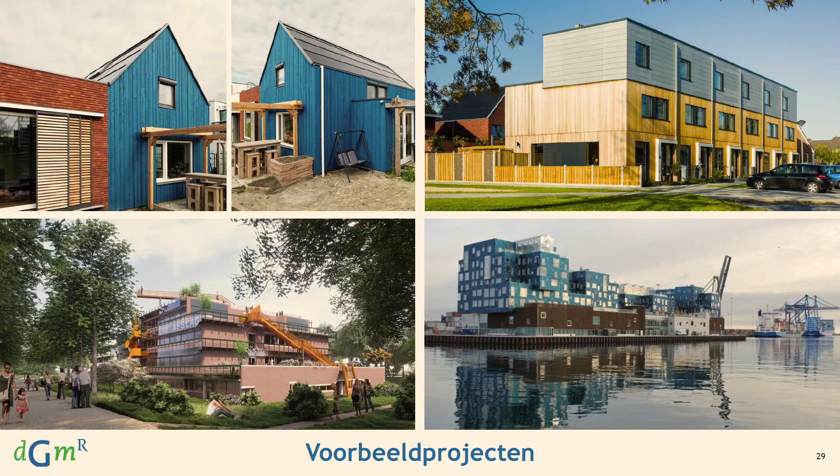These are some examples. Top left is my own house, right after it was finished. It's much greener now because my garden has really sprung to life. This is the 5.4 dwelling, which also received an Active House Award. I will dive into this a little bit more. This one is very recent, just from last month.

This is a renovation of an old army barracks office in the center of the Netherlands, being retrofitted into a hotel, conference room, restaurant thing. It also achieved an award, and I was involved with that. And this is the International School in Copenhagen — a large building with BIPV on everything, also one of the most inspiring Active House buildings.

So this, Bouw.Novum 5.4 — this is a company I've been involved with a couple of years back when I was in the process of designing my own house. We came up with a set of guidelines on how to create the optimal building, the optimal house, and I've taken those things and designed my own house.

They took the same input and created this. These are terraced houses — you can make them 2 layers or put a third one on top. You can demount them; everything is demountable.

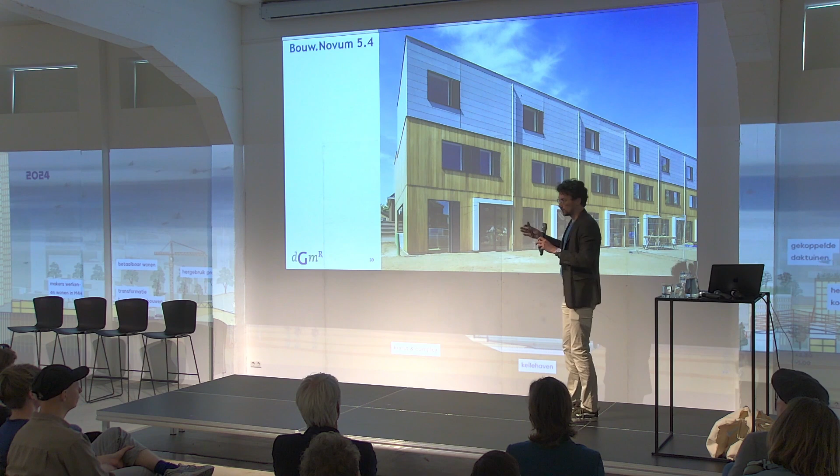But the interesting thing is that this is designed also from a building physical standpoint — it's basically designed from the inside out. We work from the indoor climate, and this is why all these houses have a solar chimney, which allows for two things: one, you can have summer night ventilation by opening the roof windows, and you allow daylight to penetrate right into the core of the building, even on the ground floor.

It's, well, as you can see, made of wood. So as Jacco explained, we have lots of carbon storage in here — it has a negative carbon footprint.

As you see here, it is frameless because the walls are made of CLT, so you don't need window frames, which is much easier and simpler from a material and construction point of view. But still, you want to open your windows.

So they have these purge windows, purge grills. You can open these in the middle and still purge your house and have ventilation, free from burglary risk. You have it also on the ground floor, next to the kitchen. Next to your front door, you can open a grill like that and have proper ventilation through the solar chimney, and on a summer night cool your house and everything.

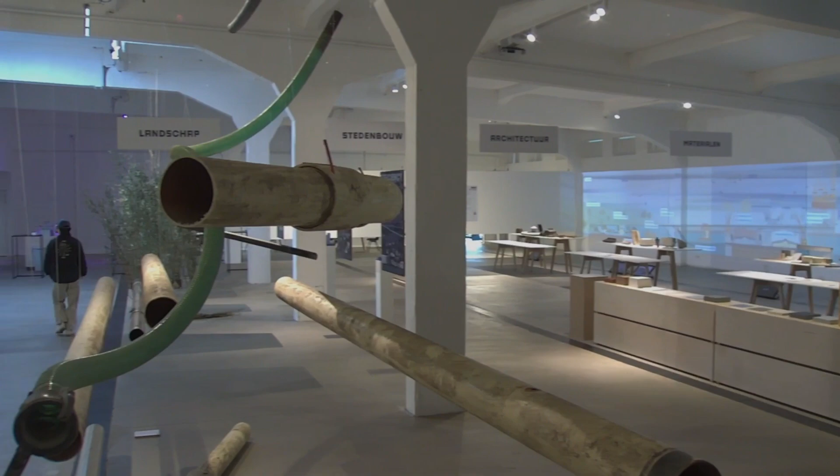Share with us, honestly, the downside of living there. What does it take in terms of sacrifice in relation to comfort, living in an active house? Honestly, it's mostly when I visit other people. No, I can't imagine living myself in a regular house anymore, because the house that I designed costs similarly to a regular traditional construction, but the performance is not comparable.

During the construction, for example, maybe I should have put a picture in there. My kitchen, my living kitchen, doesn't have a floor above it. It's straight up 6 meters high. My sister-in-law, during construction, came by, and she asked, 'Why did you not put a floor in there? Your house could have been 30 square meters larger, and more is better.' And well, it's not about the quantity of square meters. I want the quality of the house. When she walked around my house, she said, 'Oh yeah, now I see what you mean. Maybe you're right.'

But in all modesty, I asked you for the downside of living in your house. Yes, the downside. I forgot to take acoustics into account, so I originally had a heat pump that used my internal exhaust air and regained the heat from it. It was hung on a wall, and I didn't have sufficient mass in that wall to accommodate the amount of vibration that the heat pump created.